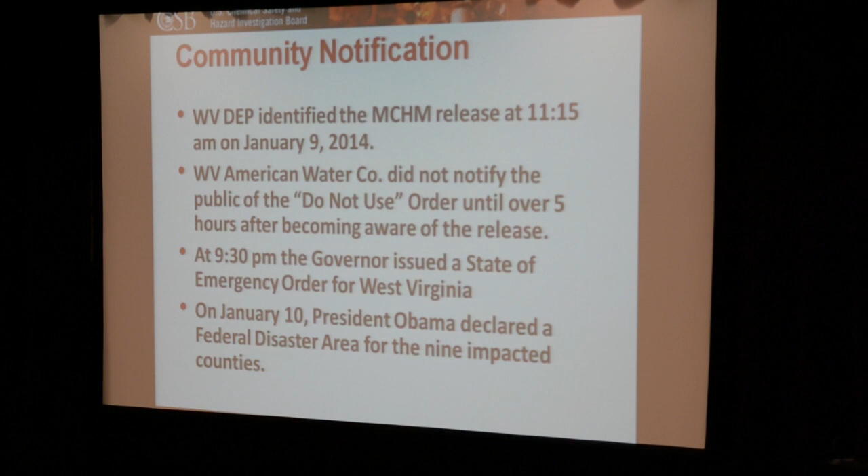not use order, and at 9:30 that night, the governor issued a state of emergency order to West Virginia. The following morning, January 10th, President Obama declared a federal disaster area for the 9 counties impacted by the leak.

In the days following the release, there were several announcements communicated to the public regarding water usage. On January 13th, the West Virginia American Water Company advised the flushing of water systems. On January 15th, the CDC issued a water advisory for pregnant women to drink bottled water. On January 21st, Freedom revealed that PPH was in the mixture released into the water supply in addition to the MCHM.

On February 5th, a spokesman from the CDC, or Center for Disease Control, announced that the water was appropriate for use. However, odor complaints continued and many area schools reported closures over the following days and weeks. On February 21st, the CDC issued a statement that described the water as safe. However, the CSB found the message to be obscure and it was not widely communicated.

In late February, the governor of West Virginia lifted the state of emergency order, and in March, the CDC announced that there were no adverse health effects from MCHM in concentrations below 10 parts per billion.

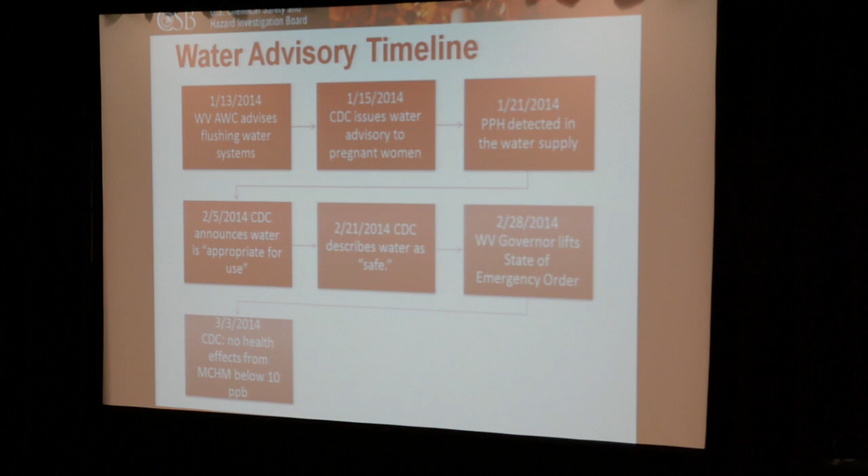Though the governor's office has lifted the water advisories and the CDC has declared the water safe for drinking, residents continue to distrust the information that the water is safe. A lingering odor remained in the water after CDC declared the water was appropriate for use. The long-term health impacts of MCHM and PPH at low concentration remain unknown.

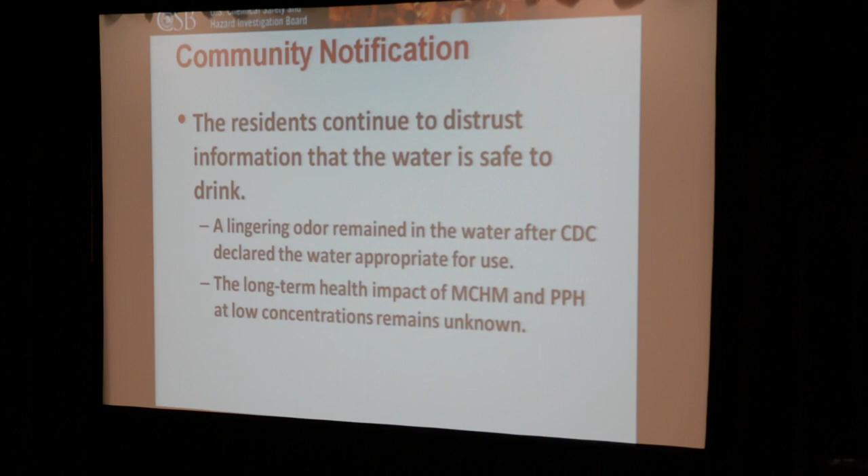From January 9th to January 23rd, 2014, the West Virginia Bureau of Public Health reviewed 369 records of patients who had symptoms and reported exposure to the water. 13 of the 369 patients were hospitalized. The rest were treated and released with intravenous fluids and medications to reduce the effects of exposure, such as nausea and skin irritations.

People were most commonly exposed to the chemicals in the water from bathing and showering. Other routes of exposure were ingestion and inhalation, and some patients reported exposure to more than one possible type for their symptoms.

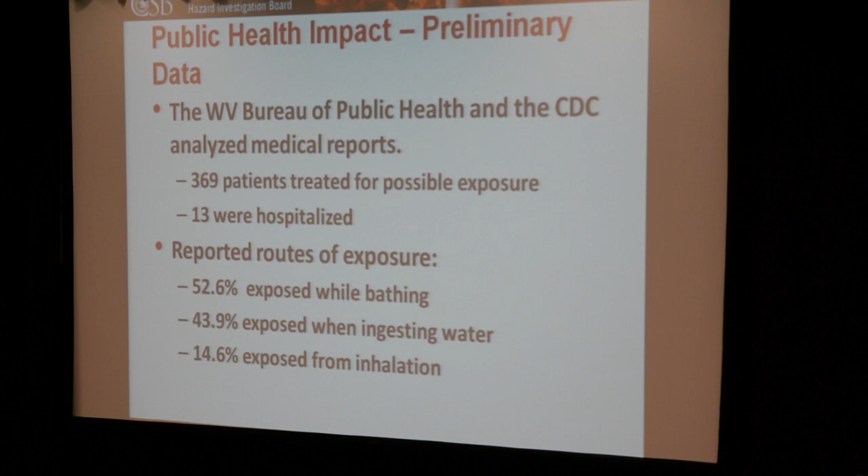In preliminary health impact data provided by the Kanawha County Health Department, common complaints included nausea, 38%, skin rash, 28.5%, and vomiting, 28%. The Kanawha County Health Department reported that these symptoms are consistent with known health effects of MCHM, and those are based on very limited animal studies.

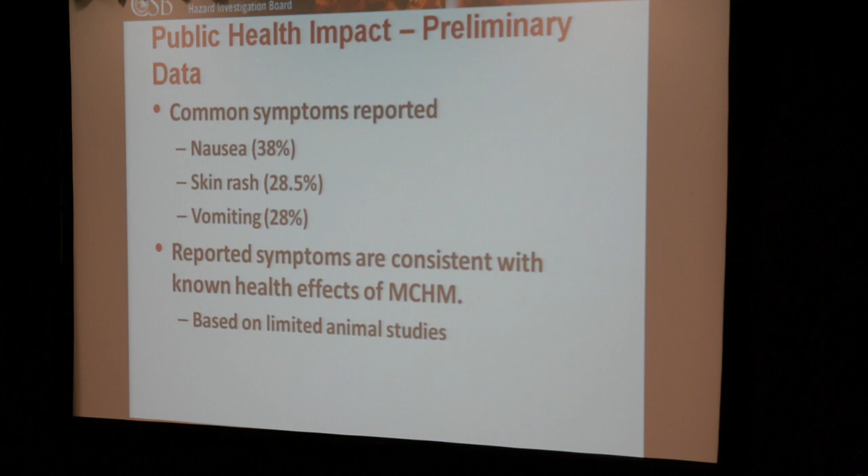One of the preliminary findings related to the public health impact is that there is limited toxicological information on MCHM, PPH, and their chemical constituents. The CSB reviewed toxicological data from the MCHM manufacturer and found that there is little data available on exposures at low concentrations. Almost all the studies for MCHM include short-term exposures to high doses of MCHM.

Also, the material safety data sheets, or MSDSs, did not provide information on the potential health hazards to assist in a timely notification of water usage restrictions.

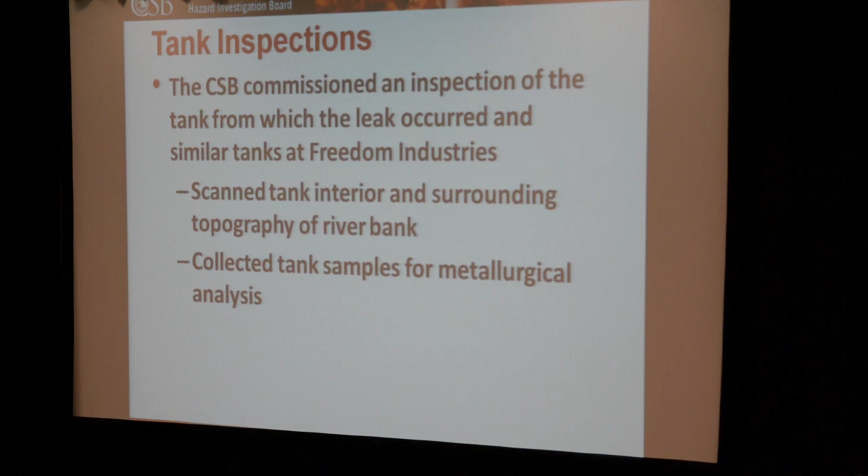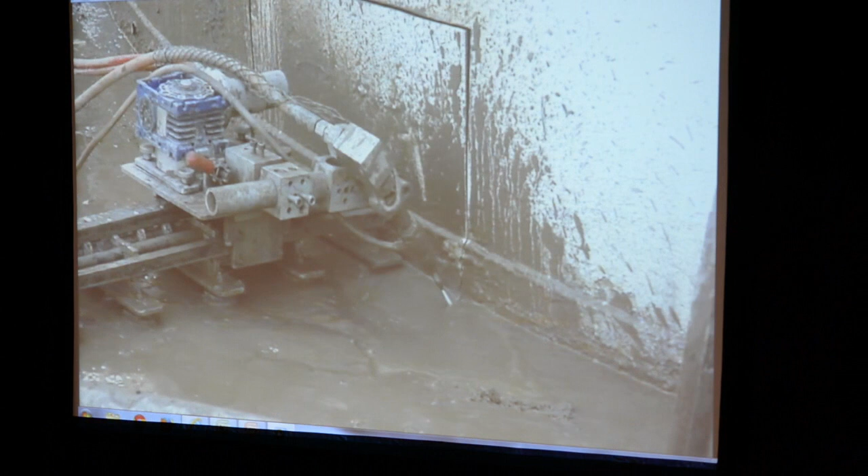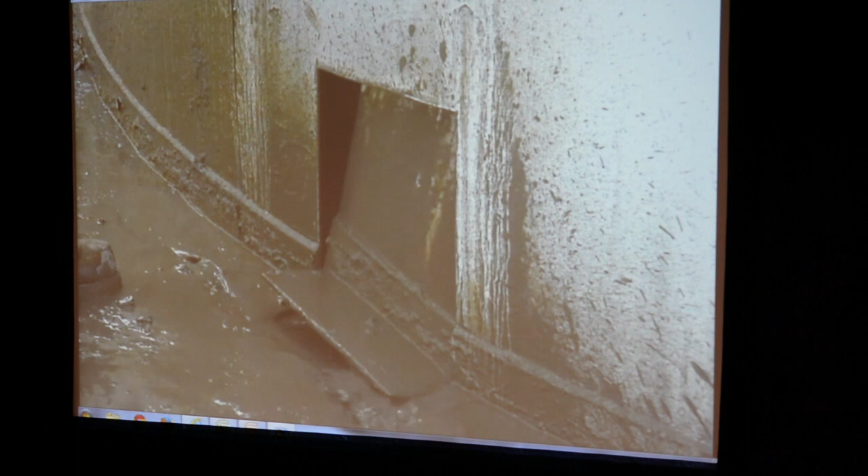This is the technique that was used to cut the samples. It's a high pressure water cutting technique, which minimized the risk of the folks that were doing the work in the presence of possible flammable atmospheres. They used a high pressure water system and were able to conduct all the cutting that we wanted on the tanks. The tanks themselves, this is the area, the main section of the tank where the holes were noted.

Here we have the two holes. One is about 3/4 of an inch in diameter, the other a little bit less than 1/2 inch. And as you'll see in later slides, there's a series of other characteristics that indicate potential failure sites as well.

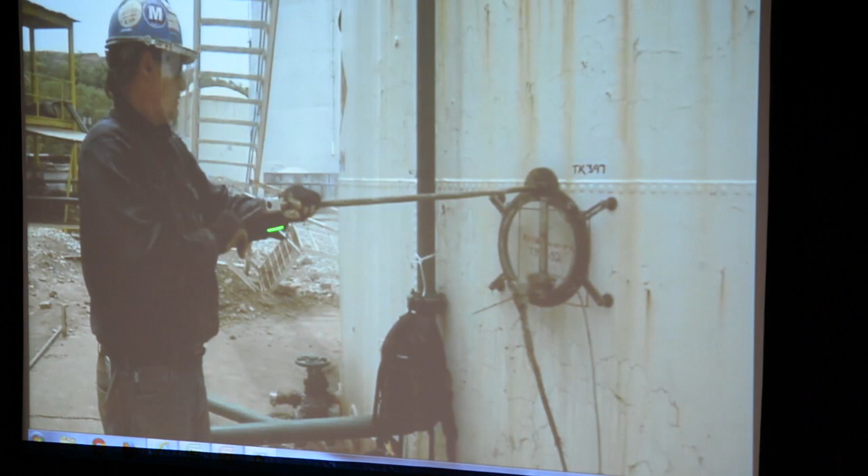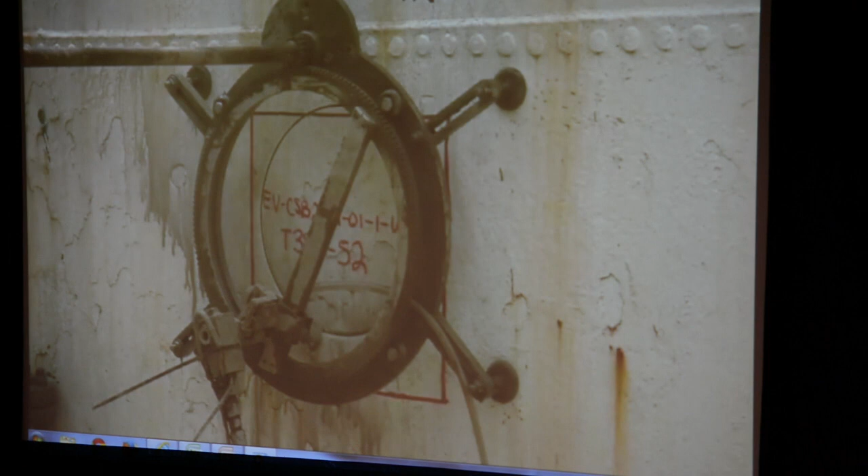This is the technique that was used to cut the samples that are called coupons. They're round sections of the tank that we gathered. There were other representatives from plaintiffs and the company there also to observe the removal of these pieces of equipment. And post-cutting, we did a pretty thorough inspection of the site to make sure that all the samples that we needed for steps moving forward were gathered.

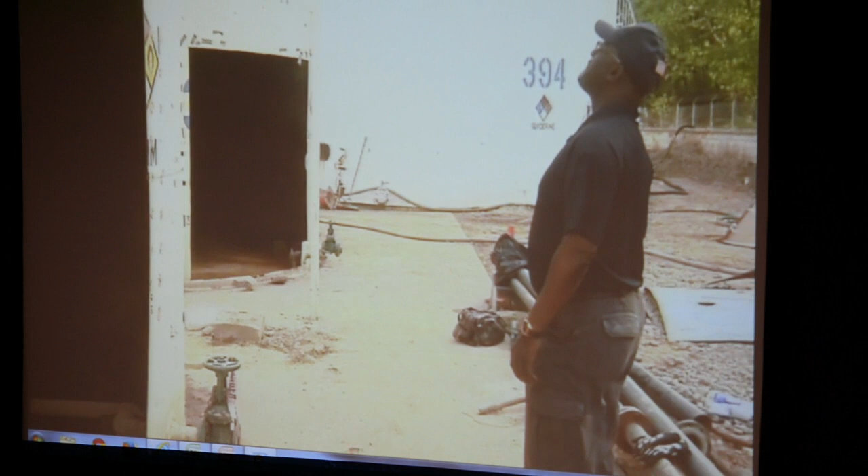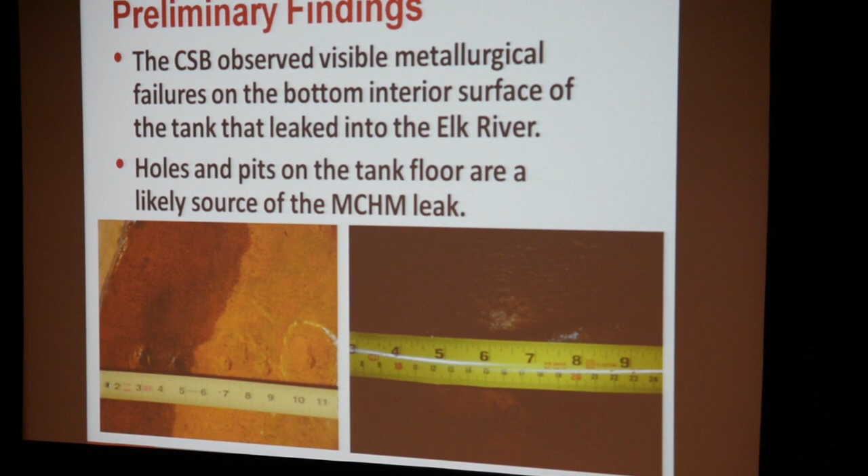Now, preliminarily, one of the early findings in this case, the inspections were conducted in accordance with the best practices today, which are the test methods as found in API 653. The API 653 inspection clearly indicated that the holes in T396 were a mechanism for the large spill that occurred on January 9th, 2014. And these are those two holes that I just pointed out, the 3/4 inch hole and the little bit less than 1/2 inch.

But then you'll also see that there is some pitting observed here, which indicates areas that would have potentially failed as well. In this slide there was a deformation in the tank wall. And we've cut this section of the tank out and will subject this to analysis as well to determine if there might have been any leaking that occurred there prior to January 9th.

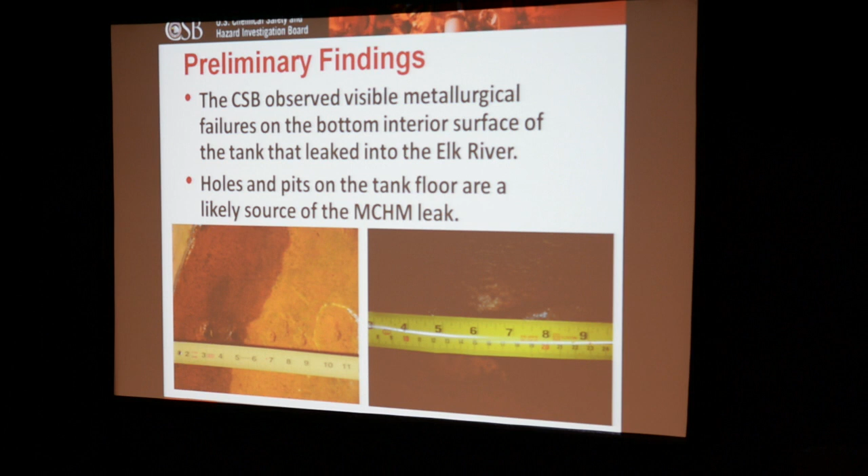The final determination on the failure mechanism will be made through forensic examination of the metals that we have extracted from the tanks at a lab that we've selected for the test to be conducted. We'll examine the corrosion modeling by an AST, above ground storage tank, expert.

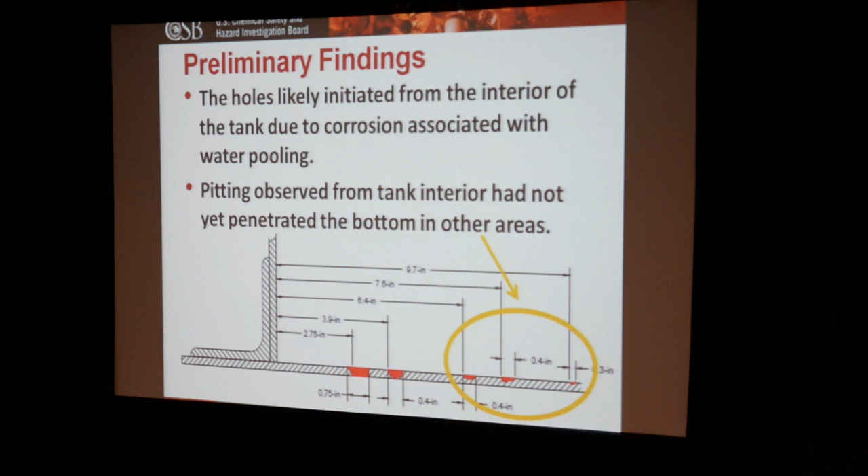And preliminarily, there is growing evidence that the holes did not originate from outside the tank, but from within, due to the characteristics that we noted earlier where, as you will note here, this hole is bored through. This hole is a little bit smaller, and these are ones that appear to be forming. And so as we proceed with this investigation, we're going to subject this portion of the tank to a really close analysis to determine if the failure did occur or the corrosion from the inside.

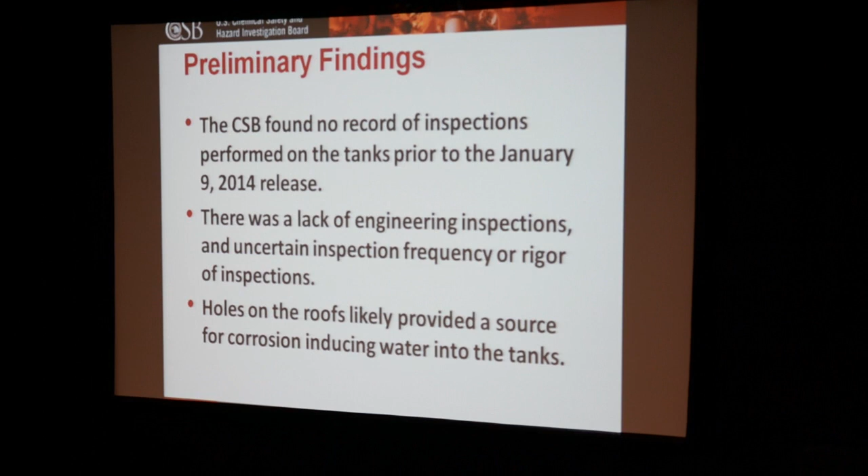To date, we have not found any records of inspections that would indicate rigorous, programmatic, regular inspection frequency, and the lack of engineering inspections that would prescribe the frequency and the rigor is something that is noteworthy for our findings so far.

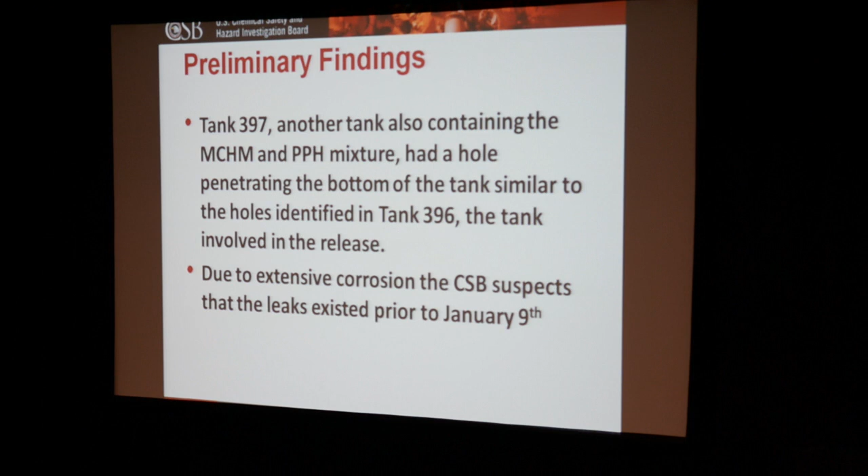Tank 397, another tank that also contained MCHM and PPH mixture, had a hole in it. And this to us indicates that there was the possibility of a leak from that tank as well. That's an area of interest for us moving forward that we will pursue to determine if this hole was leaking material, and if so, the amounts that might have been leaked from the tank prior to or after up to January 9th this year. Due to the extensive corrosion, the CSB suspects that the leaks existed prior to January 9th.

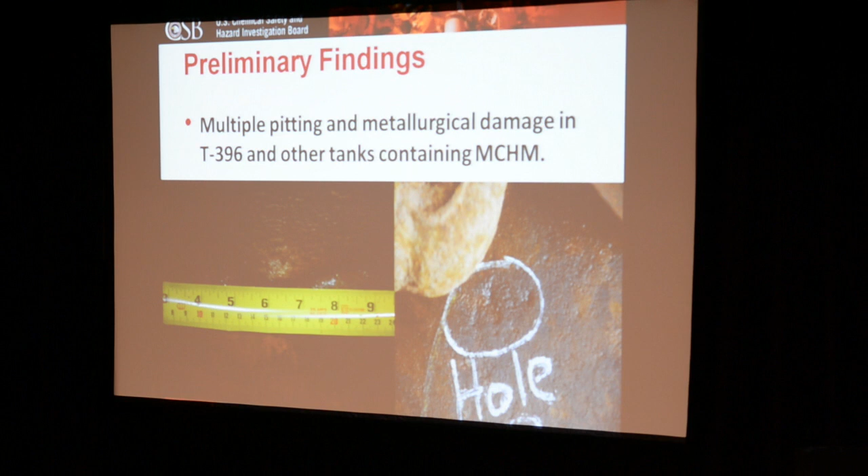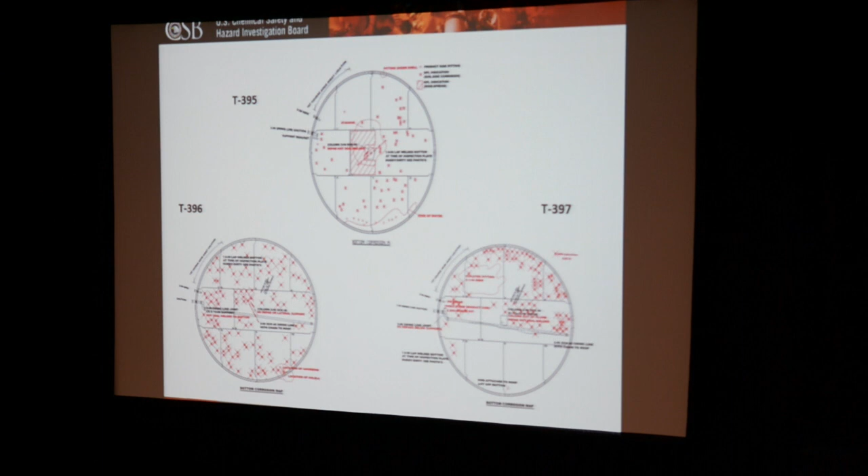In this slide, we've got the depiction of the API 653 diagram of the corrosion that was observed on T396, which is located here. But if you'll note, on T395 there were areas of concern as well, and 397 where the hole was located right in this area.

And it's important to note that these API 653 tests were conducted by multiple API 653 proficient experts. The CSB commissioned our own expert, but there were several other API 653 inspectors on site that day, and they used their own independent devices, but they have a marking system to denote where the corrosion was, and for good or bad, the conditions were kind of wet, so as one API 653 inspector would conclude, his work would be obscured because the surface of the tank was wet, and the chalk markings would be obliterated.

But over the course of the 2 days that these tests were conducted, it looked like a child's hopscotch area in terms of the number of areas that the corrosion was noted by the independent inspections that were ongoing. So these are key indicators to us that there was a serious corrosion problem growing in all the tanks, and it just manifested itself in 396 the worst, but 397 is showing signs of that type of failure, the multiple pitting, the pattern that we noted in 396, and then the fact that there were possibly holes in the roof that led to water entering into the tank and pooling in areas.

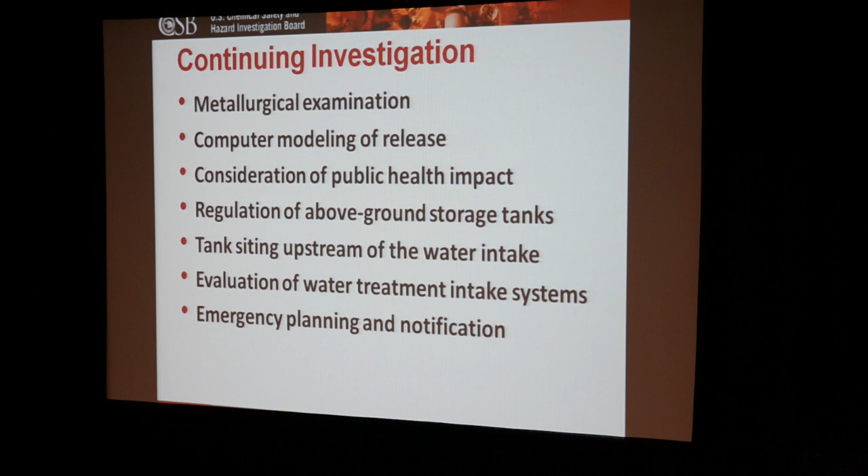That concludes the update on the Freedom Industries investigation, but we're happy to entertain any questions that the board might have.